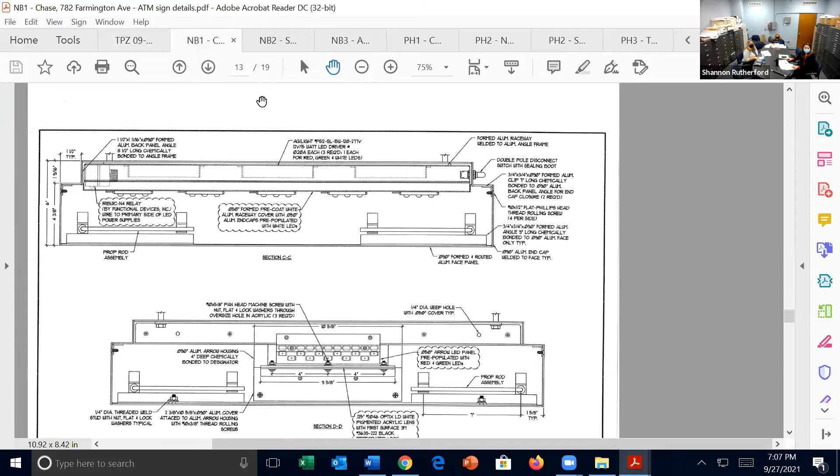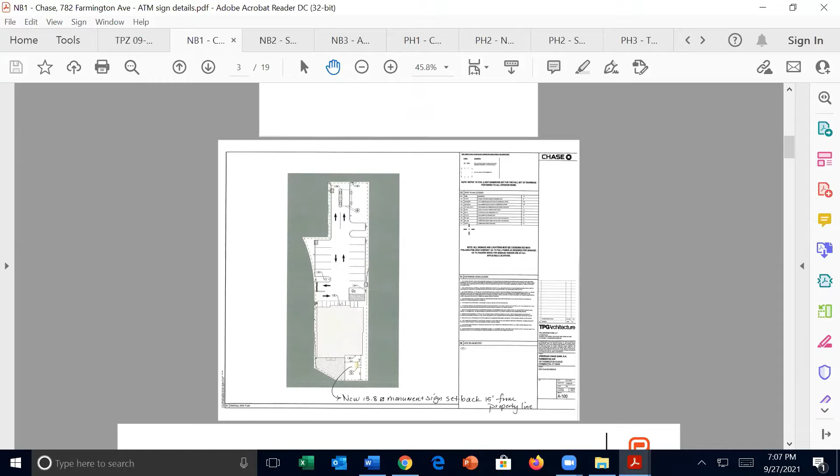Okay, good evening, commissioners. My name is Darcy Roy, as you know. I'm attending this meeting tonight on behalf of National Sign, Philadelphia Sign, and Chase Bank for the property located at 782 Farmington Ave, which is in an FV zone. The Chase wall signs at this location were already approved by TPZ, so the signs I'm discussing tonight are just in addition to those already approved signs. We are proposing a new 4-foot, 2-inch overall height monument sign. The raised logo and lettering is approximately 5.86 square feet, on a 14.3 square foot background. Both faces on both sides of the sign are sandblasted wood panels. The sides and top will have a stucco finish. The base will be brick, matching the building color. The sign will be externally illuminated on each side by one low voltage LED light fixture on the ground facing up, in the center of the sign face.

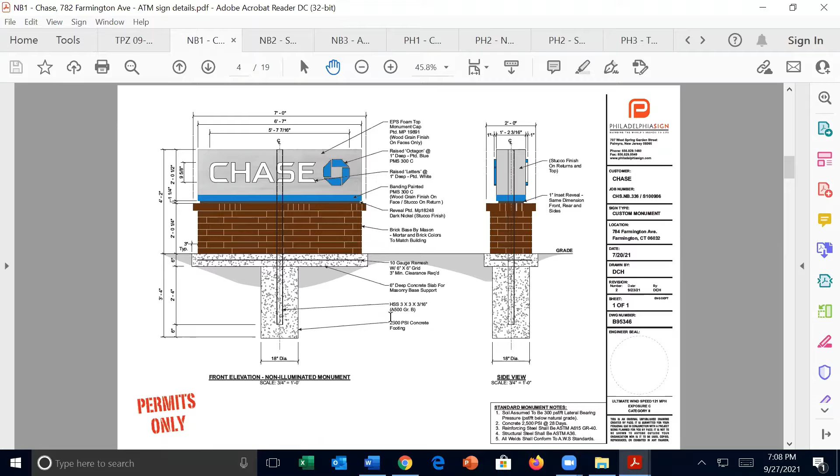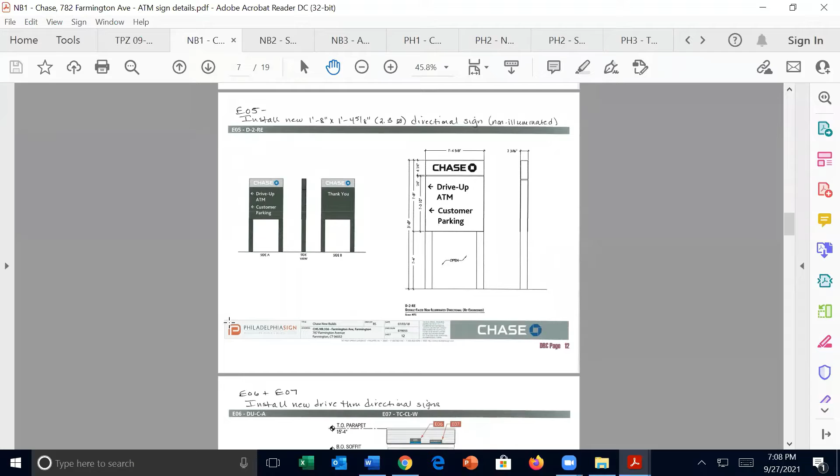In addition to this monument, we are proposing a new 2.5 square foot handicapped van accessible parking sign, and two 6.25 square foot double-faced 'do not enter' stop/DOT signs at the rear of the site off of Backage Road. We are also proposing one 2.3 square foot double-sided non-illuminated freestanding sign directing bank traffic to the drive-up ATM and customer parking. This directional sign will be located at the first entrance into the bank parking lot off of Backage Road, as you're taking a right off of Farmington Ave.

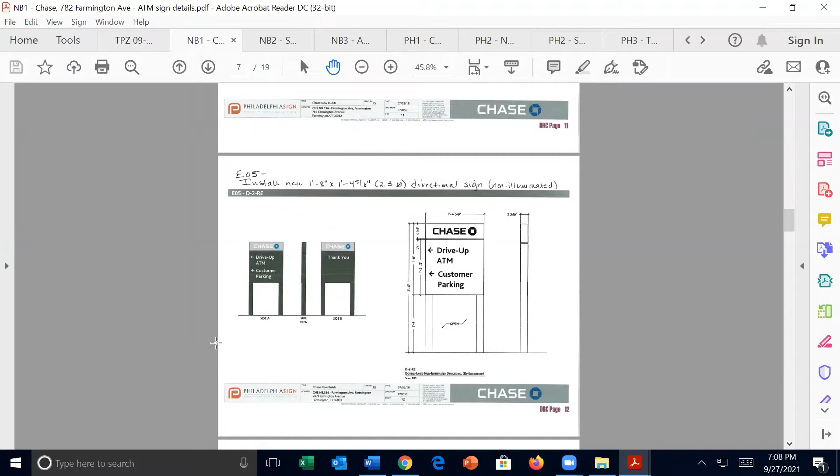Above the ATM drive-through lane, we would like to install one 3.1 square foot illuminated ATM lane sign and one 2.1 square foot non-illuminated clearance sign. The background of that illuminated ATM lane sign will be aluminum with routed out ATM lettering, which will illuminate at night along with the arrow.

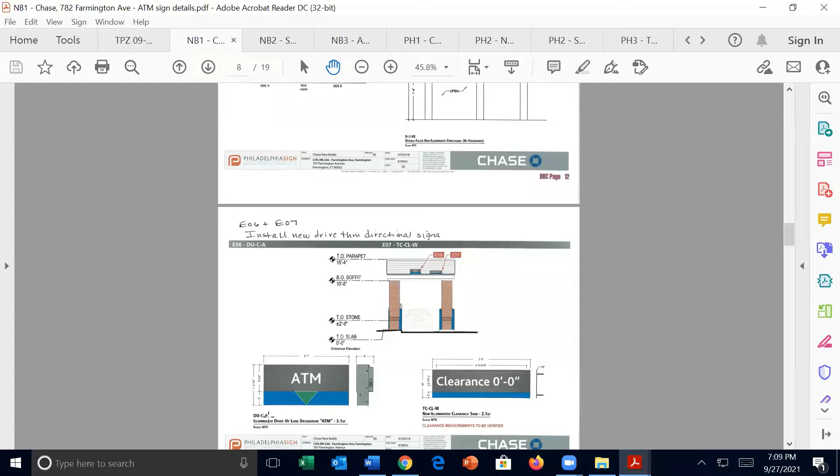I believe we meet the Farmington Village District Zone Code, given that one, we're proposing a monument sign constructed with natural materials of wood and brick. Number two, the monument sign's brick base matches the building, and the sandblasted and stucco sign cabinet will reflect the character of the surrounding area and the bank itself.

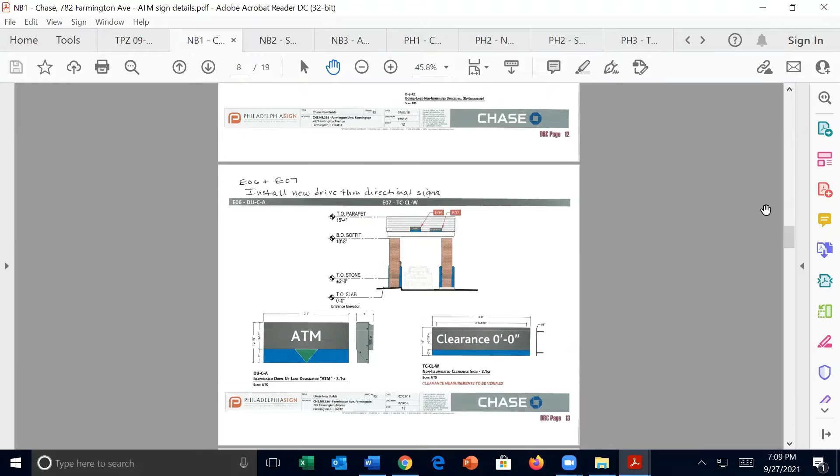We are proposing external illumination of the monument only, and the internally illuminated ATM lane sign will not be visible from Farmington Avenue as it's located behind the main building in the back of the parking lot. You also can't see that ATM lane sign from Backage Road, since it's on the opposite side from the entrance.

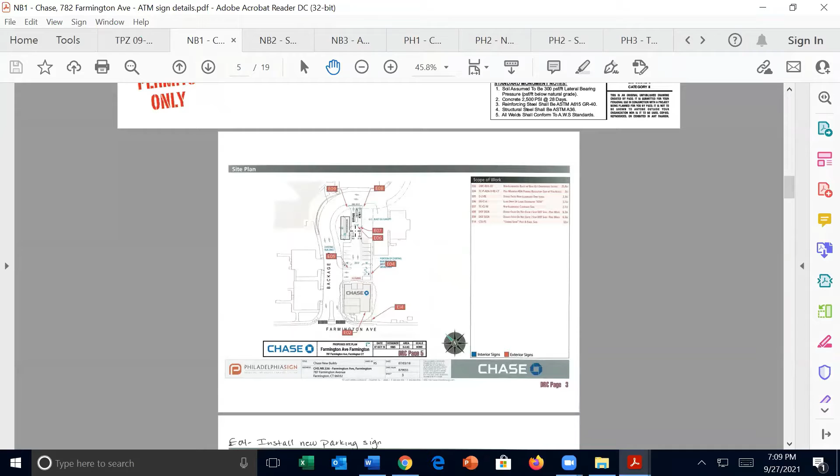So I know it didn't go in order, sorry, I didn't follow your scrolling order, I hope it wasn't too confusing. All those signs are listed right there on that site plan, if you have any questions as to where any of them are.

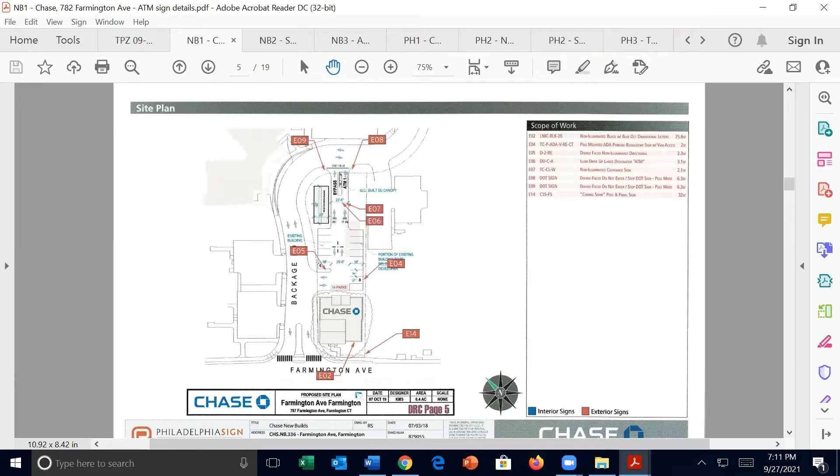Okay, no other questions. That's usually something this commission seems to ask questions about, so I was wondering if that is just going to come before us again, or is it just going to be left as is? That's for staff, I guess. Staff will typically review any changes to the approved sign plans and sign drawings. So is that a change?

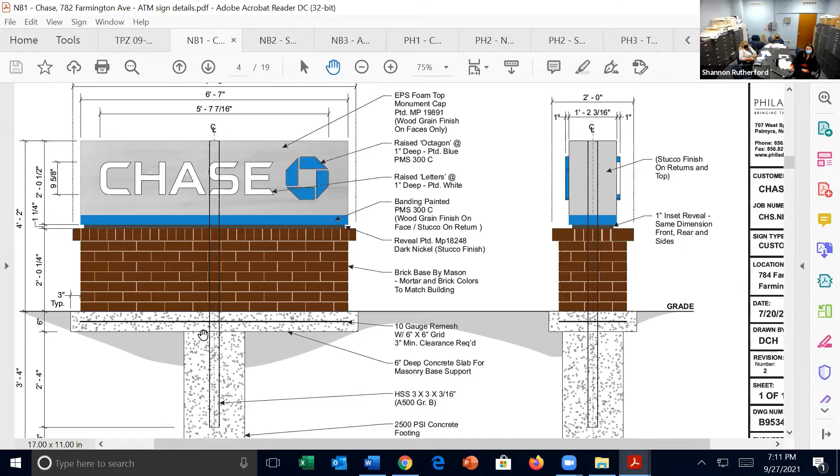Well, so you're proposing to have the location of the light here. Yep, this is the updated signage that was approved by ADRC. Right, so there's a monument light, a detached light just here at the base. I believe that was part of what went before, I wasn't there for that meeting unfortunately. But what was originally submitted to the town does show that uplighting, I'm not sure why it's not part of that package. I replaced this because there was a newer one from the commission, but let's just see because there are more drawings in here.

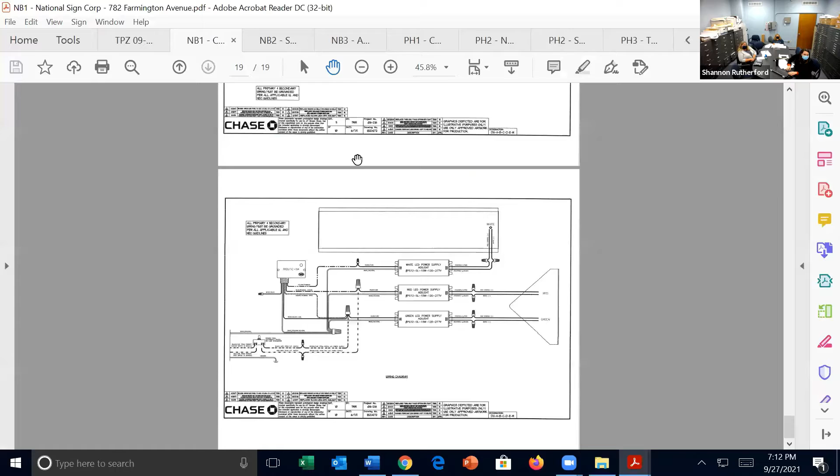There it is. Yep, this one has it, so Patrick, that shows where it is. Okay, yeah, no other question. It said that in the agenda review, but I didn't see it on there and there was no mention of it. But that's it for questions for me. Thank you. Mike, no questions, thank you.

Marcie: I guess this is just a general question, is this in the historic district, and if yes, has it been approved by the Historic District Commission? It is in the FCFV zone. This is Catherine Kramer, so it gets reviewed by the Architectural Design Review Committee. They looked at this last week, had a few tweaks to the sign face, and they have come back with a sign that has since received a positive referral from the Architectural Design Review Committee.

Great, okay, then I'll get back to there. Sorry, no I just apologize for the screen. There we go. Oh okay, no that looks great, and I think it fits, and most of them are in the back, so not an issue.

Thank you. Did John have anything? Yeah, he's here. Hey John, do you have any questions about this application? No, I don't. Okay, thank you. How about you, Keith? No questions, thank you. And Scott? No questions, thanks. And this is Ines St. James, and I do not have any questions either.

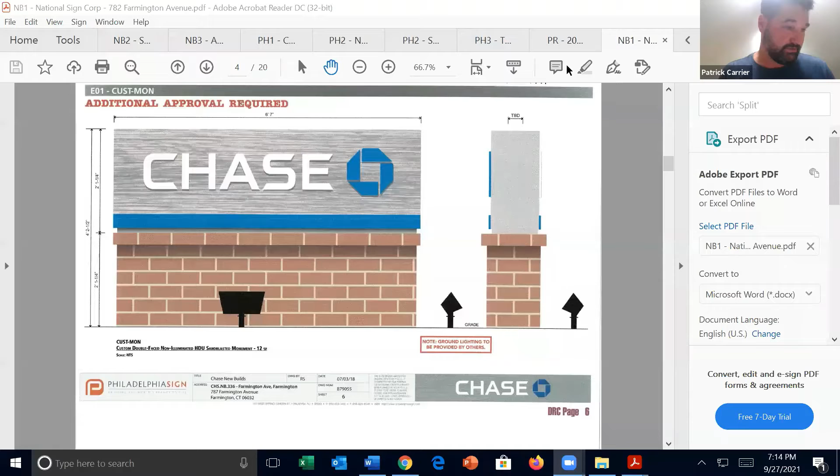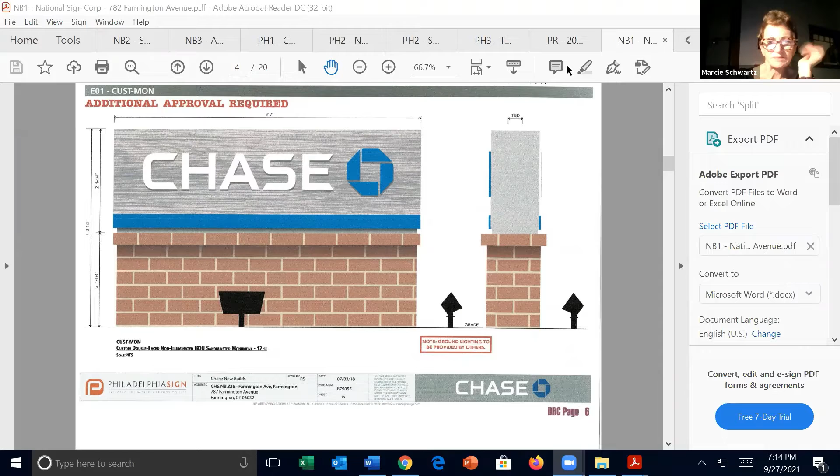Patrick Carrier: I make the motion for approval of the sign application from National Sign Corp located at 782 Farmington Avenue. Keith Weber: I second. All right, thank you, all in favor? Aye. Aye. Opposed? Abstention? Motion carries, thank you, thank you very much.

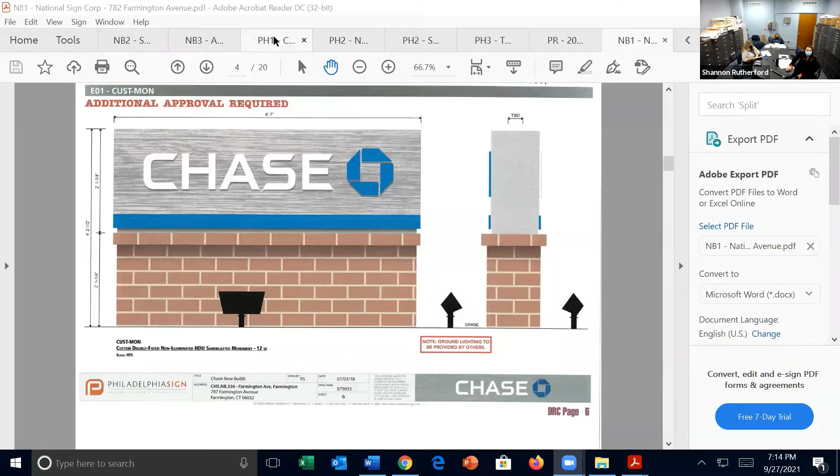You don't see them? No, so why don't we come back to that one and we'll move forward. Okay.

Next item, new business item, is site plan to replace site lighting at 781 Farmington Avenue.

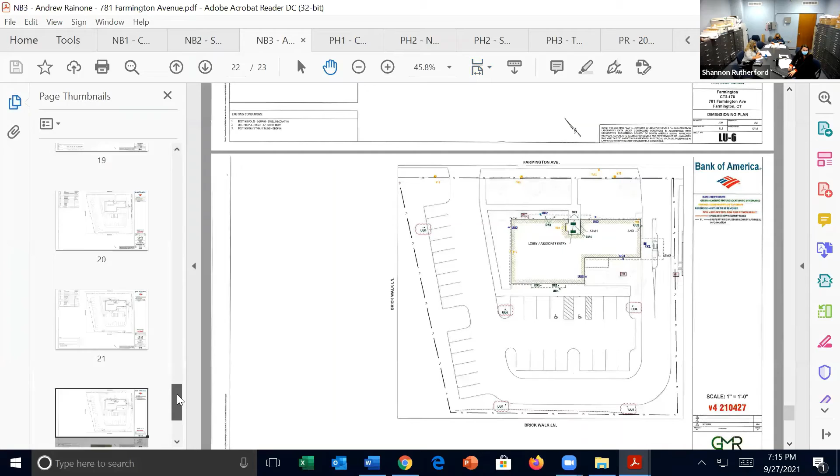Andrew, I have the application on the screen. You're welcome to present to the commission. Good afternoon, everyone. My name is Andrew with the Horton Group. Bank of America would like to replace some of the existing lighting as well as add a few new fixtures, including 5 wall mount colonial style fixtures to improve their security lighting for the safety of their staff and customers after hours.

We've gone to great lengths to reduce the amount of lighting, especially at the property line. If you look at the foot candle chart, we're actually very low compared to some of our other sites. So this is really just going to be a small improvement, more of a visual improvement with the new decorative fixtures on the property. Very minimal light leak, if any. If anyone has any questions or concerns, please let me know.

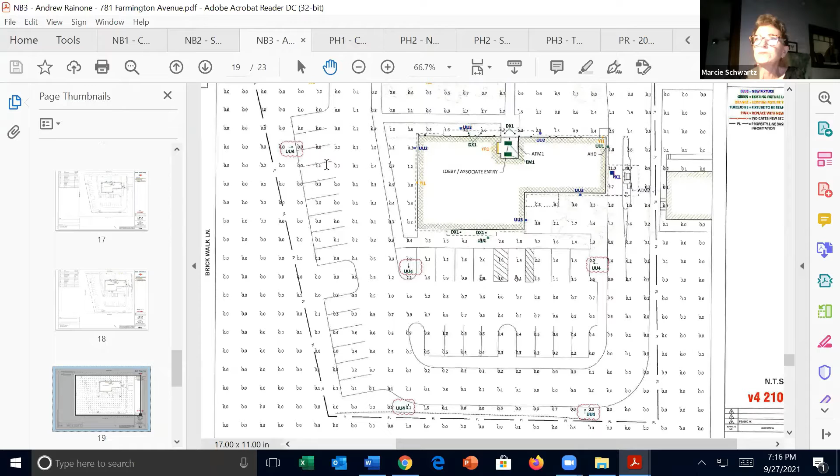Okay, thank you. All right, commissioners, Patrick, you have any questions? Not right at this moment. Okay, how about Mike? No questions, thank you. Marcie? No questions. Keith? I have no questions. John? No questions. And Scott?

No questions. Okay, so this is a replacement, right? If I don't mind, Andrew, you can see my mouse, right? Yes. So if I'm circling around these ones that are looped, UU4 here, here, here, these 5 are replacements? Correct. So those are existing square steel poles with shoebox metal halide fixtures on them. We're going to be adding a gooseneck and the decorative colonial style light pole fixture to those existing poles.

Great, and then these ones, UU2, 1, 2, 3, and this one, are new? Yes, so those are new wall mount colonial style fixtures that'll be on the building. And then one new one is a 2x2 fixture on the drive-up canopy directly above the drive-up ATM. Thanks for the clarification. That's what the application is for. We're good? Okay, I just wanted it all on the record.

Everyone knew what was new and what was being replaced. It went by a little fast, and it's hard with the site plans to see all of the different annotations. Okay, and this is Ina St. James. I do not have any questions either. All right, so we need a motion and a second for this application.

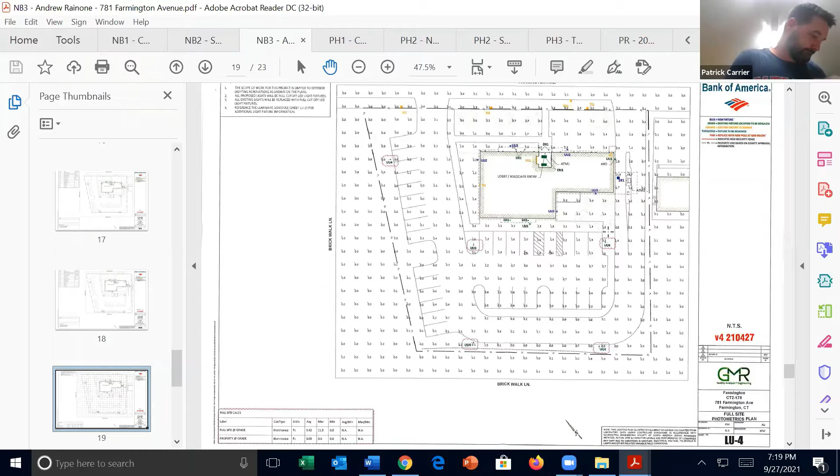Commissioners? Okay, hang on. All right, Patrick Carrier. I move to approve the site plan to replace site lighting by Andrew Ronan - sorry, mispronounced that - Rainone, site lighting at 781 Farmington Avenue. Second? I second. Thank you. All in favor? Aye. Aye. Any opposed? Any abstention? All right, motion carries. Thank you, Andrew.

And is this prior application, is someone here for Plains Lab? I don't see that yet. They were on last week for their architectural design review. Okay, proceed. Can come back if they join us at the end.

So the next one is just scheduling a hearing date, correct? So we accept the application. Do I read the whole thing? Yes, I probably should. Okay, all right, back in order.

All right, the next application is from JDA Farmington LLC. We're accepting an application this evening for a re-subdivision of 784 Farmington Avenue and scheduling a public hearing with a recommended hearing date of October 13th, 2021. We need a motion and a second.

I'll do this one again, I'll get better at this, I swear. Me too. All right, I move to accept the application for a re-subdivision by JDA Farmington LLC of 784 Farmington Avenue and schedule a public hearing with a recommended hearing date of October 13th, 2021. I second. Thank you. All in favor? Aye. Aye. Any opposition? Abstention? Motion carries. Thank you.

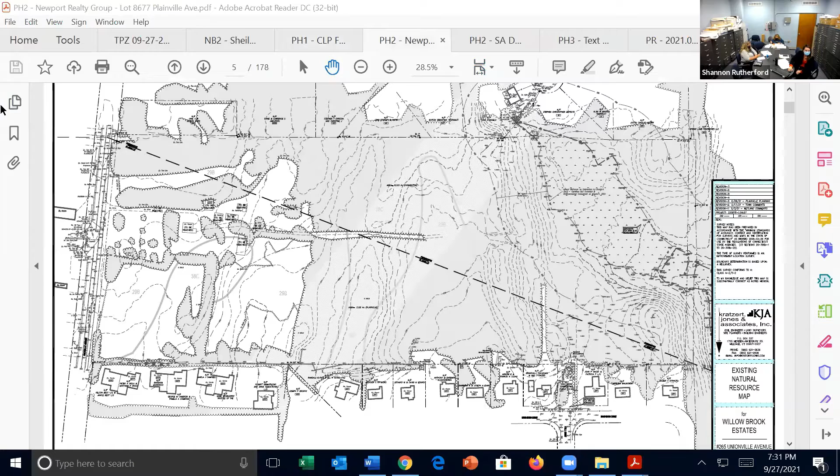All right, moving right along. All right, we have the second public hearing from Newport Realty Group LLC. It's an application for change of zone from R20 to SA, Special Permit and Site Plan for active adult development located at 8677 Plainville Avenue. And who do we have presenting?

Mark, are you on the line? Good evening, Madam Chair, members of the commission. Chris, thank you, can I go ahead? Please, thank you. Okay, yeah. All right, good evening, I'm Chris Hoheb. My office is located at 314 Main Street here in Farmington.

With me are the principals from Newport Realty Group LLC, Mark Lovely and Anthony Valenti. Also, Andrew Quirk, an engineer, and Scott Hesketh will testify. He's a traffic engineer. Procedurally, the mailing is complete.

I should note that with each notice that went to the neighbors, it was coupled with correspondence from Mark making himself available to answer any questions or provide any information. I'm not aware of anybody contacting him. The maps, plans, and reports were timely filed with town staff. I think the most recent update was September 23rd -- Andrew can correct me later if I've got that wrong. The sign was posted on the 19th and it's been maintained, and the notices were published.

I would like to give you a 2-minute summary of this parcel. As you know, it lies in Plainville and Farmington, and it existed primarily as agricultural land for personal use in the 1970s and 1980s, and then it was used to grow and cut hay until the 1990s. The current topography still retains features of that farm use. As an agricultural use, it was essentially clear cut for personal farming use and for hay.

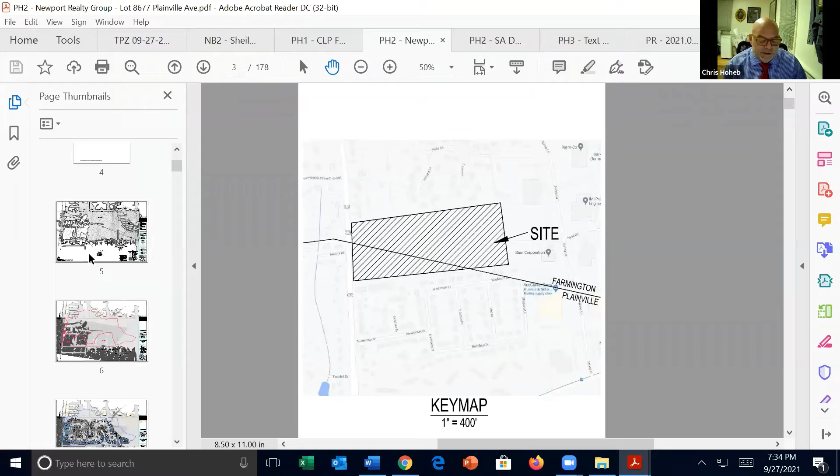And I think they've worked very well with this staff and also very well with the Plainville staff, as evidenced by a unanimous vote in Plainville supporting the approval. Our engineer in this matter, Andrew, and our team worked very hard with staff.

And as usual, Bruce Sear, Shannon Rutherford, and Ms. Kramer were all extremely helpful, assisting and providing us information and feedback. It felt almost like we were streamlined because we got the plans in very early after the Plainville approval, and staff has really been terrific. By Friday, Bruce Sear had reduced the engineering comments considerably, really to a true minimum. I'll let Andrew speak to that when he's up.

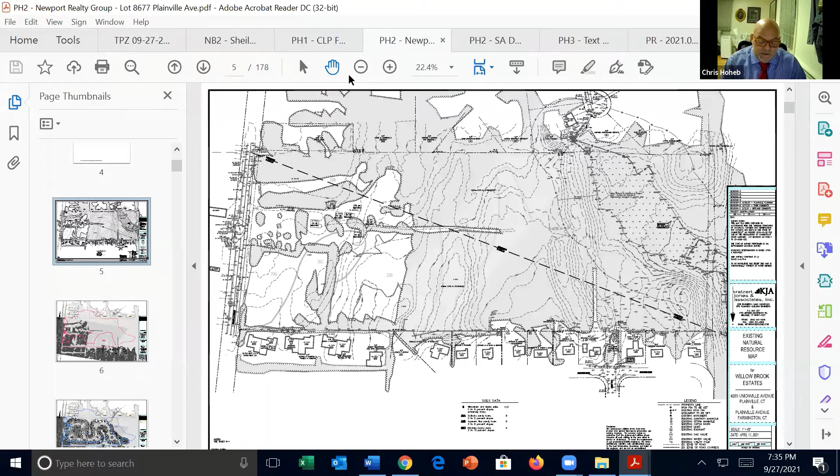Procedurally, let me bring you up to date. This spring, the Farmington Inland Wetlands Commission conducted a thorough examination of this parcel relating to the application for regulated activity within wetlands review and upland review area, and they also walked on site as part of their inspection. On May 26th, the commission issued its approval with conditions. On July 20th, 2021, the Plainville Planning and Zoning Commission unanimously approved 38 units of active adult housing as part of the entire application.

I know many of you were not around when this original active adult regulation was ratified in Farmington. I think I may have been on the commission when it was originally ratified and passed, or by my recollection, if I was not, I was very familiar with the underpinnings of the zone. At the time, it was a very stringent regulation in terms of requiring certain components to make it attractive and fit within the community, and I think it hasn't been changed since. It's a much more stringent examination than you see in other communities. So the purpose was to allow folks over 55 to find lower maintenance dwelling units, and certainly these fulfill that aspect.

For tonight, we're going to perform the initial presentation covering all the salient requirements of the zone change, the special permit, and the site plan. And of course, we'll be available at the end for questions from the commission and to respond to the public.

Andrew Quirk, our engineer, is going to speak first and discuss the site plan. He's also going to talk about the architecture, and Scott Hesketh will talk about the traffic. And I'll conclude with probably not as exciting, but very important criterion and requirements of a zone change and a special permit, which are similar. All their testimony could be supported by Tony and Mark, who are present in case we miss something or they want to provide more information to the commission.

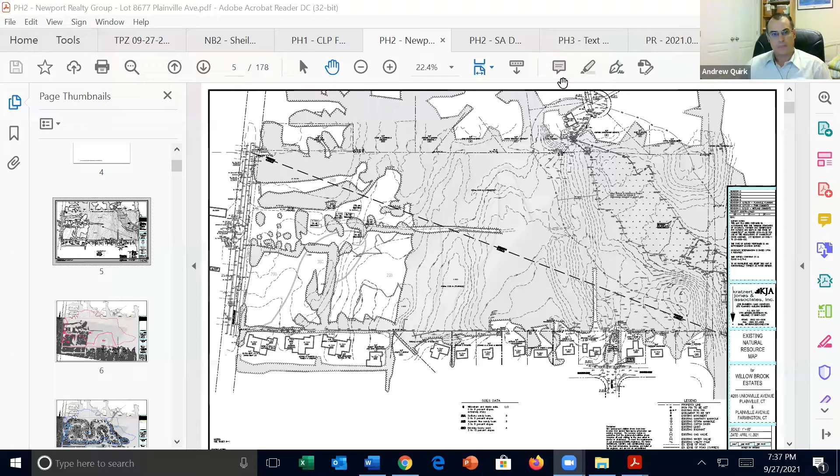Again, Andrew Quirk, professional engineer and principal with Kratzer Jones and Associates. As Chris had talked about, I'll be going through the survey mapping, the site plan layout, get a little bit into some of the utilities, drainage, and the details of the landscaping. And then at the end, I'll be happy to take any questions.

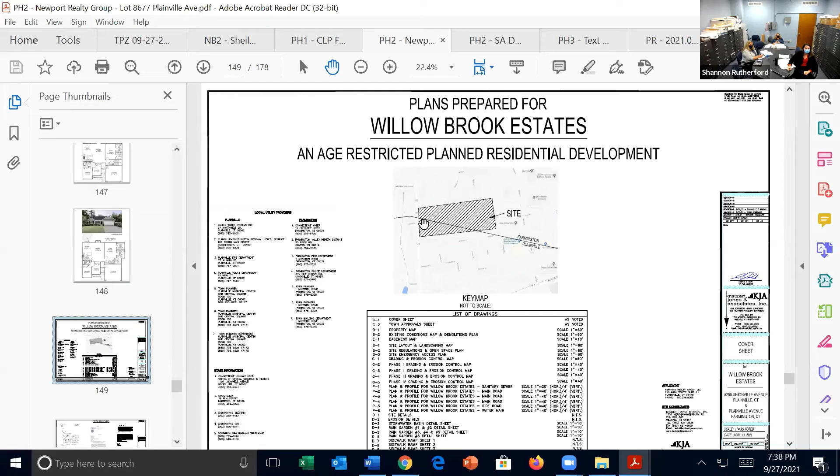I guess just for pragmatics, Shannon, if you want, I could do a screen share, or I can walk you through which sheets I think are appropriate for the presentation, whichever way is easier or better from the town standpoint. Hi, Andrew, this is Catherine here. I have this cover sheet right here, if you want to walk through this set. That's fine, I have color aerials as well, if there's a screen share. No, we're not going to be screen sharing this evening, it's for control purposes. Sure.

So on the second sheet, page 150 there, for the commission's information, those are the approval letters, both from the Farmington Wetland Commission, describing those conditions, and as well the approval through Farmington, which I think had only one condition, a detail of the phasing plan. So those approvals and conditions have been incorporated into the latest plan set on that sheet.

To begin, on the next page, sheet P1 is the existing property as was described. The total property is 25.66 acres. It straddles the Farmington Plainville line, which is shown diagonally across the property. There are 12.63 acres in Farmington, so almost an equal split. The hatched area to the right or northeast portion is the area that was delineated as inland wetlands, and the flags located by our survey.

And then outside of that is the 100-foot upland review area. We already received approval from the Wetland Commission for the one activity in the wetlands itself, which is a minor off-site crossing. It's not even on this property, but towards the top, for a sewer connection to Laurel Lane. The sewer connection comes right through that portion and just caught the end of the wetlands, which was within the review area requiring a permit. So we received that permit. All the other activities are generally outside of the 100-foot upland review area.

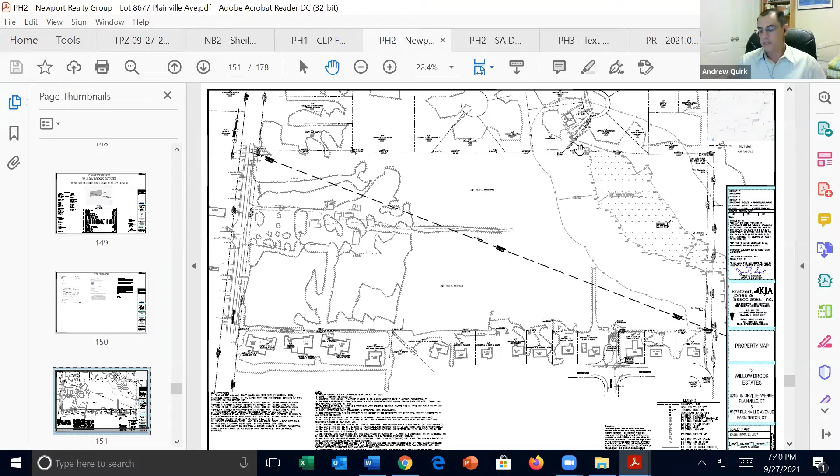I'll get into it more with the site layout plan, but there was also a condition of that approval that, in addition to the open space being controlled by the homeowners association, an easement be granted to the town for the open space area, including the wetlands and all the surrounding area, to give that area further protection in addition to the protections of the homeowners association, so the town could also step in to ensure that area remains protected.

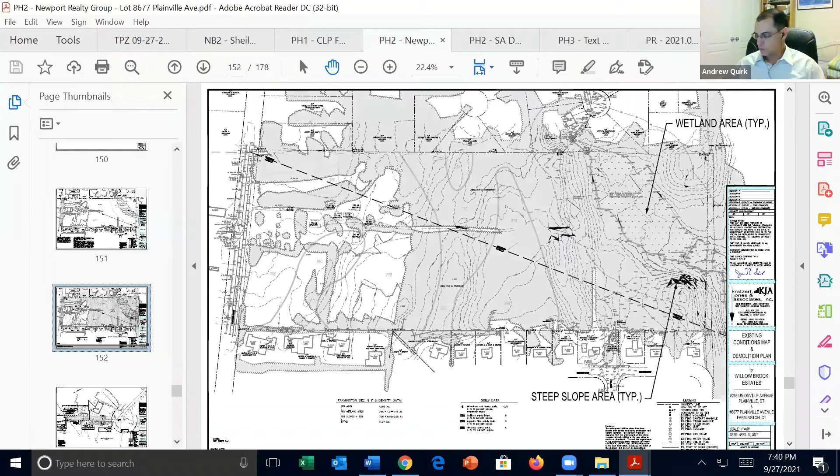Going down, I believe, two more sheets - would be sheet S1. I believe one more page down. Yes, so sheet S1 is the overall site layout and landscaping plan.

This page gives you the best overall basic view of the development, which would have access from Route 177, Unionville Avenue in Plainville. So the only vehicular permanent access to the site would be through Plainville. That roadway network would then cross the site in a way that works well with the grades and for aesthetics, in a curvilinear fashion from west to east on the property to a cul-de-sac in the lower right portion, with a turnaround area there. Then there is an emergency access - not your standard access, but just in cases of an emergency - that would also connect to Plainville. To the top right portion, there's a small clearing for the sewer access, again only for sanitary sewer, not for vehicular access. So all the permanent vehicular access will be through the state highway.

We've already started contact with them, and our traffic engineer, Scott Hesketh, will go through that in more detail as far as the vehicular access.

The site would be fully landscaped, the areas that are cleared with street trees. There'll be a street tree in uniformity with Plainville standards every 60 feet on each side of the road, with a variety of trees that meet the street tree requirements for shade and aesthetics. We also got into the details of the shrub plantings around the foundation. There's a large buffer area along the north property line to be retained, as well as natural vegetation within the development between the different phased areas.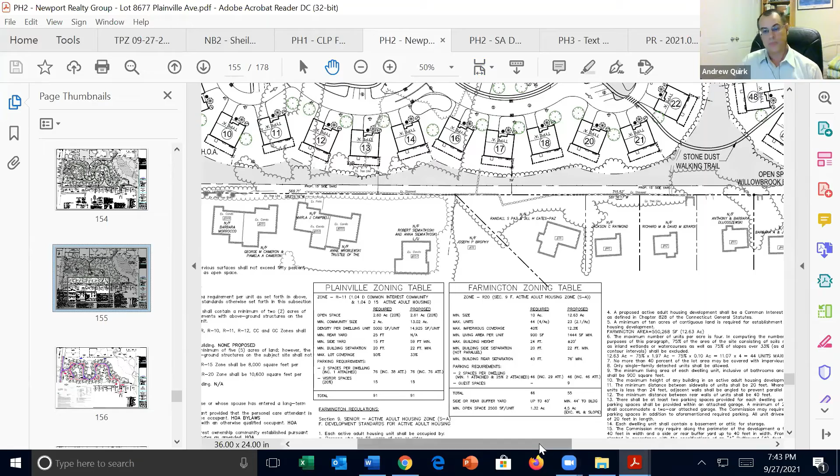On sheet S2, this is in a little bit more detail than S1, where we get into the regulations. On the plan you'll see both the Plainville and Farmington regulations, but specific to Farmington with the zoning table, there are many specific regulations. So what we did is we included the text verbatim from the regulations and then provided the answers right on the plan, so it was clear we were meeting each of the zoning regulations, and then we summarized that in the zoning table.

Again, the Farmington portion is 12.63 acres. There are 23 units proposed in Farmington, whereas 44 are allowed. We have 12.28% impervious, where 40% is allowed. And then there are some other architectural and separation requirements we also meet, including a minimum of 22 feet between the units.

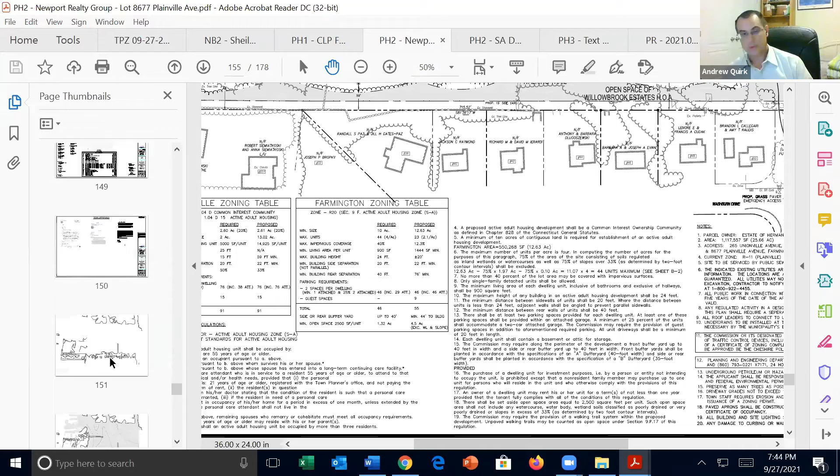All the units will have a 2-car garage. Also, outside of the 2-car garage there's the ability to park 2 cars outside the garage - we didn't count that towards the parking table, but that ability exists. And then we provided 9 visitor spaces. So 46 spaces are required, and we're providing 55 between the garages and visitor parking areas.

We also have that north buffer area identified to preserve the natural vegetation per your requirements - that's 1.1 acres that will be held by the Homeowners Association as a natural vegetated buffer. In addition to that 1.1 acres, there are 5.4 acres on the east that will also be held by the Homeowners Association, with an easement deeded to the town to protect the wetlands and all the area around that. So that totals 6.5 acres out of the 12.63 acres in Farmington - just about half the area will be preserved as open space within the Homeowners Association, with that 5.4 acres also deeded to the town for protection.

Item 19 in your regulations talks about using these buffers, landscaped areas, and vegetation areas to create a community feel and a community walking trail system. So we've outlined a system where on all the private roadways, there'll be a sidewalk on one side that provides a walking network along the streets.

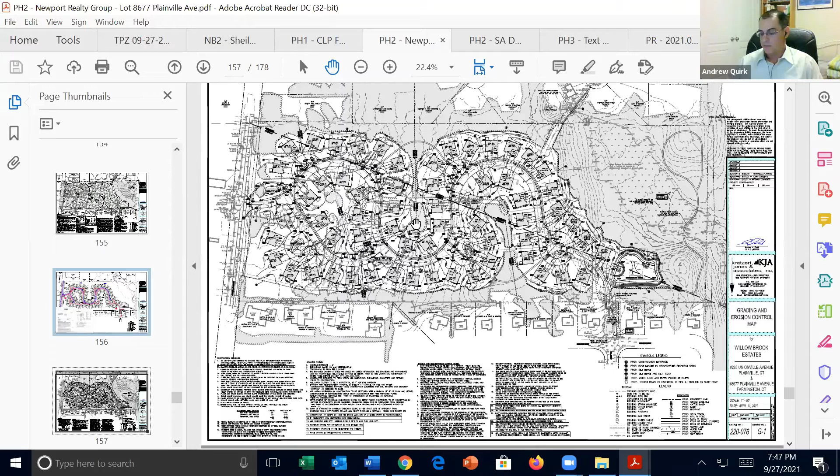On sheet G1 is the overall grading plan, and it shows the phasing. I won't go too much into detail of the grading and utilities, but I want to point out that in addition to the 23 units in Farmington, there are 38 in Plainville. Phases 1 and 2 are entirely in Plainville, and phase 1 has all its utilities also from Plainville. So that's really a separate, independent phase from the Farmington application.

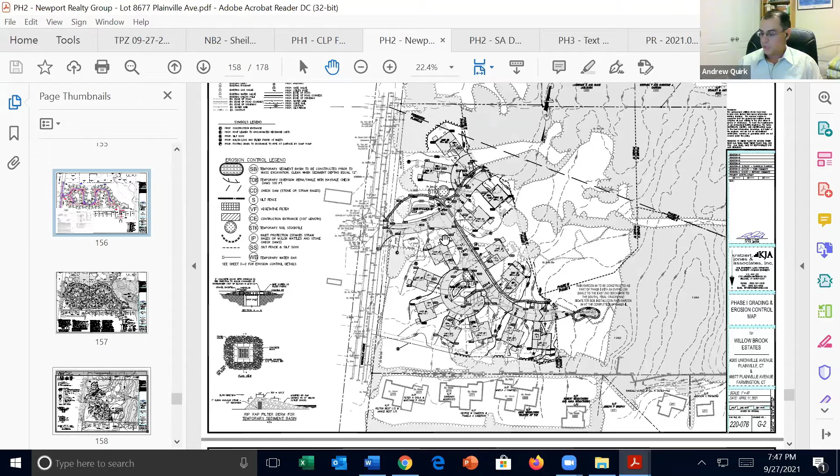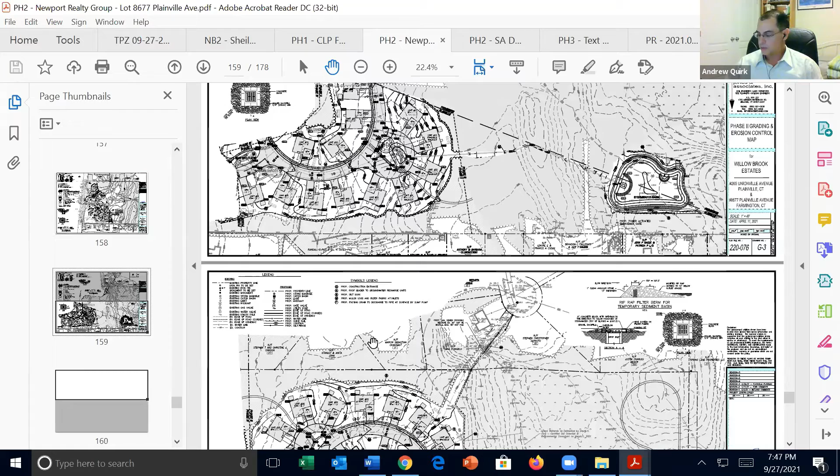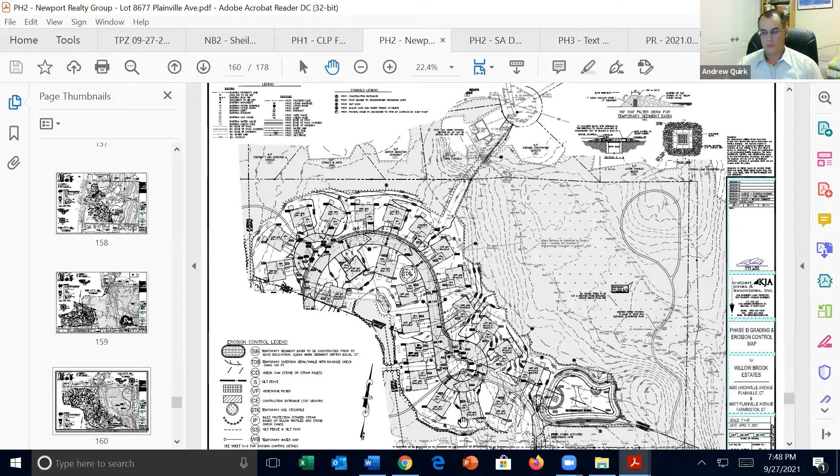Phase 2 has all homes in Plainville, but the sewer access will be through Farmington. We've worked very closely with town staff on the sewer access, and we've already received the wetland approval and the intertown agreement for sewer service to the Plainville residents. Phase 3 has nearly all but 5 units in Farmington—there are a few units on the cul-de-sac area in Plainville, but with the road system there, we've included it as part of phase 3. Same for phase 4 towards the northwest, which is about half in Plainville, half in Farmington.

The phases are really important in terms of clearing. One of the conditions the engineering department put on this is that only one phase is to be cleared at a time, which we've noted on the plans. This helps control the amount of exposed soil, erosion, staging, drainage, and implementation. We expect all 4 phases to be completed in around 3 to 4 years, typically about a year per phase, maybe a little faster.

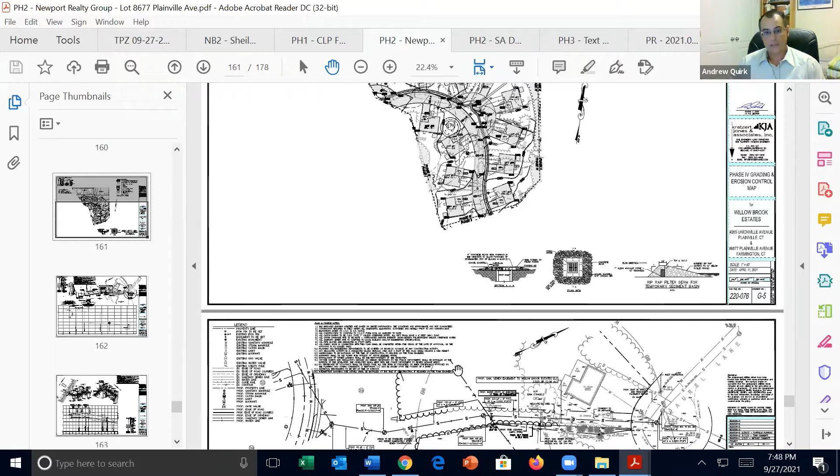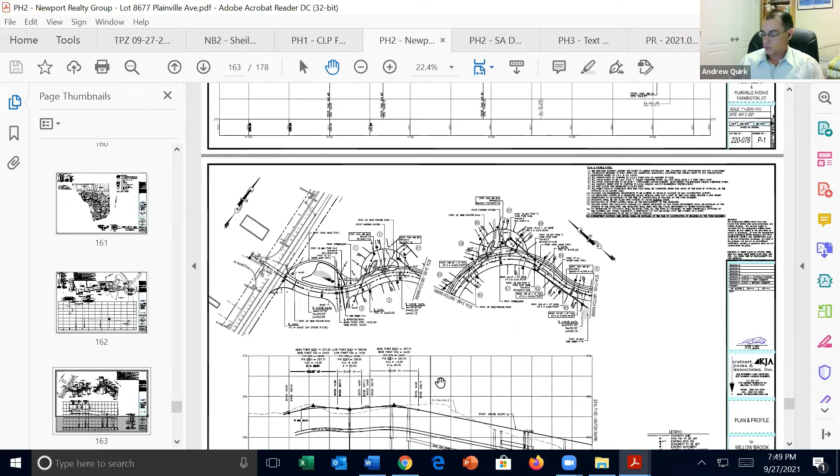We've worked very closely with town staff on the stormwater management plan. Within each phase, there's a rain garden system which provides aesthetic value through plantings and pollinator abilities. We've got detailed landscaping plans for each rain garden that help with water quality and low impact development, while also providing some attenuation in peak runoff. All the drainage is conveyed down to a stormwater basin in the far southeast corner of the property, and we meet zero increase in runoff through the 100-year storm event—the 2-year through the 100-year storm event—through that combination of rain gardens and the stormwater basin.

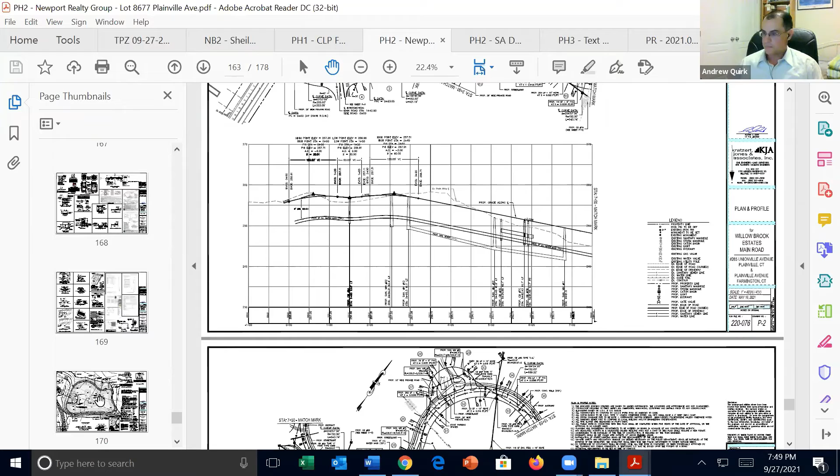Again, we've worked very closely with town staff. I don't want to speak for staff, but as of Friday I think we were down to just a couple of technical notes that need to be worked on together regarding the sewer connections and some notes regarding the phasing. Really, we were down to just some minor details. It was a very thorough review, both at the wetland stage and through this planning and zoning stage, and I think we've been able to complete and satisfy all those comments and work with town staff.

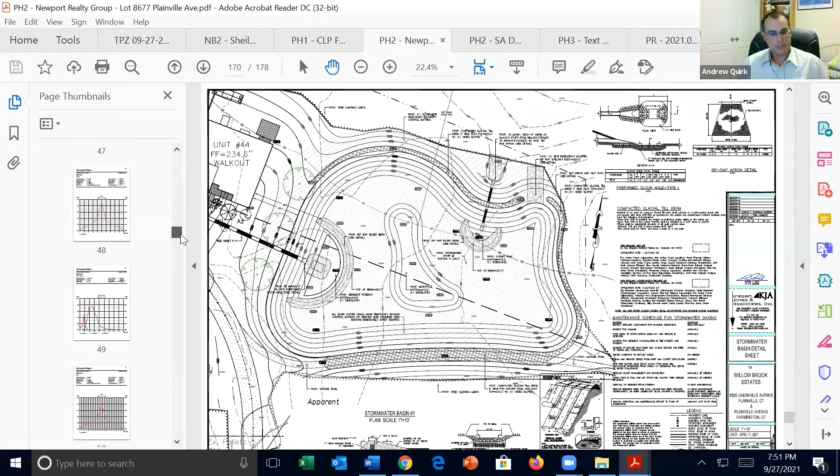I will briefly go through the architecture as well. I don't know if that's included in the same PDF—it might be at the end. They were in here, it might be a separate PDF. I think that's all the traffic information. We're proposing 3 different styles of units, labeled unit style A, B... yeah, it was in this, right before this plan set. I thought it was at the end. I thought I reorganized it so they were in order, but I didn't touch this one. That's all the drainage information—somewhere, it's in here. It's definitely a long drainage report. Yeah, there's a lot of work that went into this. Comprehensive. Now we have traffic—and that's traffic, yeah.

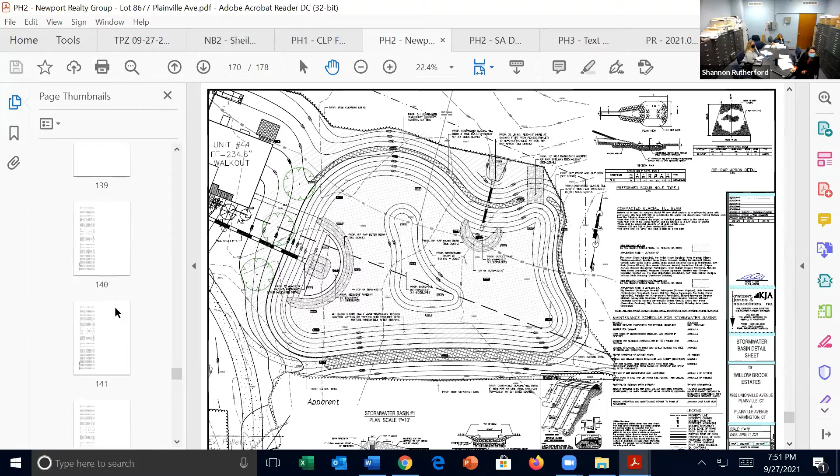Is it what you said today? No, that was traffic, a different one. Comps, here it is. Oh there, yep, there. Sorry about the delay, guys. Yeah, no problem.

It's a comprehensive package, so we have 3 unit types: house plan A, B, and C. They all have first floor master bedrooms and are all at least 1,400 square feet. In addition to the unit types, there'll always be a variety of colors and styles. They'll never be the same color allowed on 2 adjacent units or 2 units across the street from each other.

They're all 3 bedrooms. That's really not because of the occupancy. You have in your regulations the requirement of the occupants to be over 55, or a family member over 21. But we find that the additional bedrooms are used more as a study or a den, things of that nature, but they are labeled as bedrooms. Very nice large units that have been very successful in other towns and have sold well. I would expect the same for this project if it moved forward.

And with that, that would conclude my portion of the presentation. I think next would be Scott Hesketh to discuss the traffic.

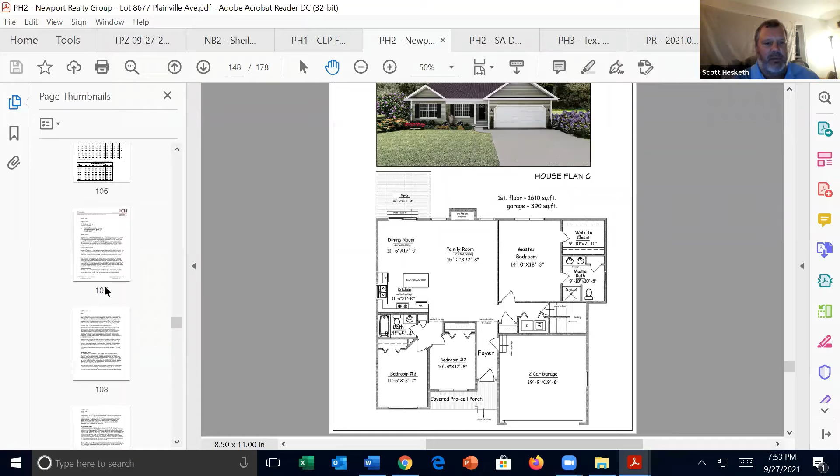We did submit a traffic report dated April 21st, 2021, which is now up on screen. We were asked to take a look at the potential traffic impacts of this proposed development. In order to do that, we reviewed traffic volume count data from the state of Connecticut. We also conducted manual turning movement counts out at the intersection of Route 177 and Maxine Road. Due to the COVID situation, we ended up relying on 2015 traffic volume counts from the DOT, as the most recent counts from the DOT were taken during the COVID conditions.

So we used the 2015 count data and grew that at a 1% per year growth rate to reflect 2022 traffic volumes, and adjusted that based on the manual turning movement count percentages we observed in the field. DOT did not have any traffic volume counts on Maxine Road, so we increased the traffic volumes on that roadway by 20%, which was basically the difference between the 2015 counts and our 2020 observed traffic counts. So we believe we have a good handle on the background traffic volume conditions in the study area, and all that information is presented in the report.

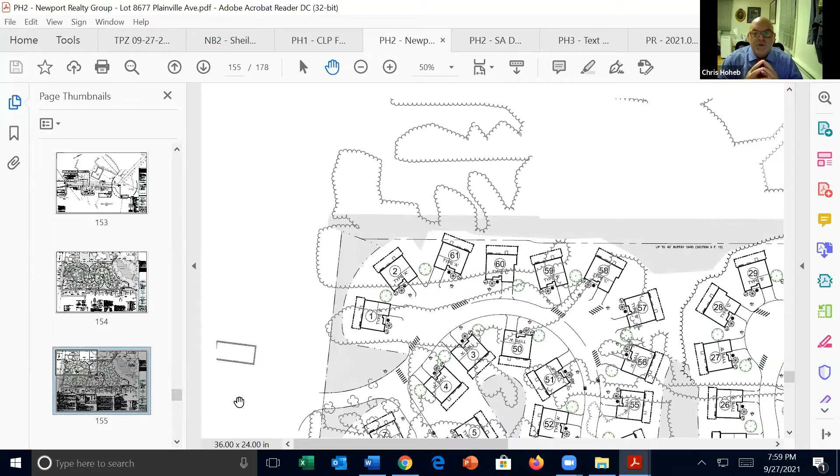Thank you, Scott. Members of the commission, I'd like to take about 5 minutes to go through the criterion and standards described in section 12B of your Farmington regulations as they apply to a zone change and a special permit. I know you're all very familiar with these standards, but I want to apply them to the facts of this application.

The first is that the existing and future character of the neighborhood will be protected. I think it's noteworthy that there'll be no through traffic. There's no egress into Farmington directly - it's in Plainville - so the Farmington neighborhoods will not be impacted. There's plenty of buffer around the entire application. It's residential lighting, and I don't see any possibility for noise to be created. I should note that waste removal will be by private contract, so the association has control over the hours - it's not like a town where they come in really early. So I feel pretty comfortable representing that the character of the neighborhood will not be impacted.

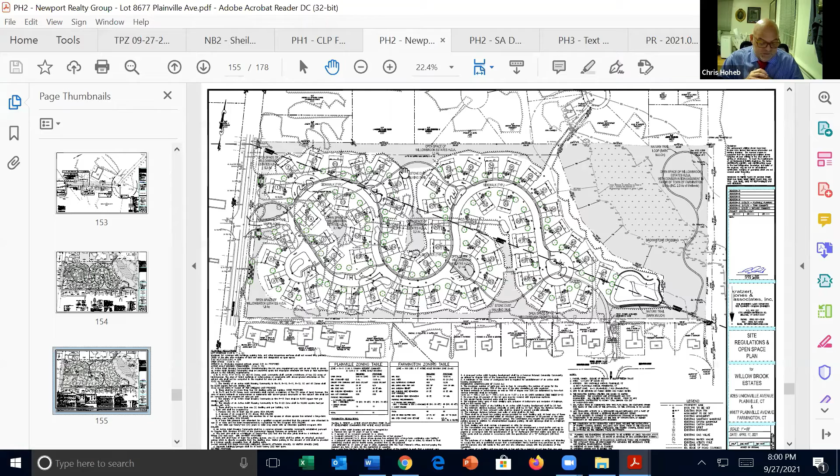The next criterion is that adequate safeguards have been taken to protect adjacent property from detriment. Other than the initial construction, the surrounding Farmington neighborhood and streets will have little or no contact. While there are some walking paths that could be accessed, there will not be any motor vehicle traffic. And there is the emergency exit, but that is not going to be open except as available to municipal emergency services. So again, I don't see any real impact.

Next is that the traffic circulation within the site and the amount and access to parking is adequate. You've heard our engineer discuss parking being adequate. I should note that the design follows a lot of the topography - it actually fits extremely well. And I want you to note that these roads are curvilinear, not a grid pattern - very much a New England feel. I think that supports the adjacent neighborhoods in that it creates more of a New England or rustic feel in terms of the appearance of the entire application.

Next is that the road network, to include intersections, will be capable of handling the traffic generated. Again, the entrance and exit are in Plainville.

You should also note this is an active adult community, so there'll be fewer people in the units, and very probably you won't have teens or school buses. Active adult over 55 has typically a different schedule than younger folks who have to get to work at a certain time, so there's a return from work and a leaving for work. People over 55 have a different kind of rhythm in terms of traffic.

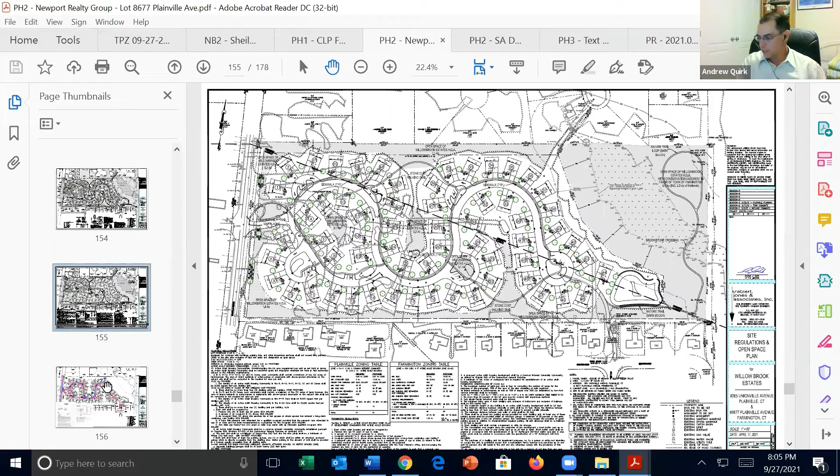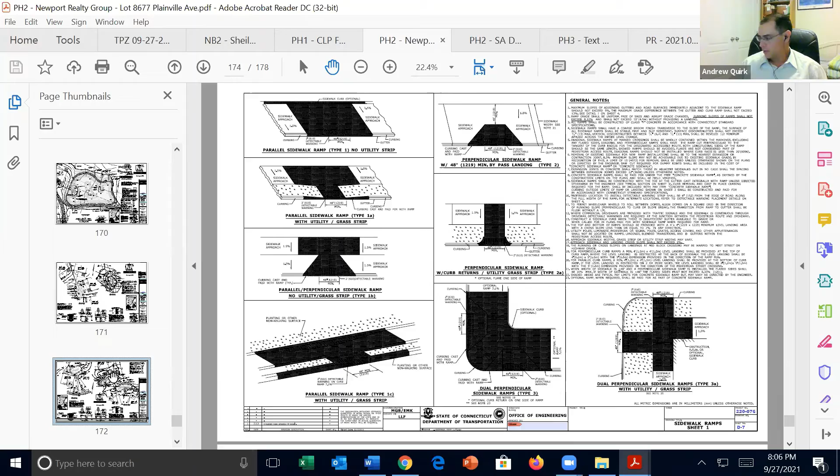What kind of lighting is there, site lighting? The plan is hard for us to see, it's small on the screen, but can you go through the lighting? Yeah, Andrew Quirk again, the engineer. Excellent question—we're proposing lighting shown on the roadway plans along the private roads. There's a detail on sheet D2, quite a few pages into the set, about 8 pages from the last page of the plan set. Sheet D2 shows a colonial style lantern, street type lantern, and on the right side it shows the type of fixture to be mounted on poles, similar to what you'd find on public streets, but with a colonial style lantern.

And somebody must have gone through it for light pollution and all that. Yes, that was part of the review.

Okay, thank you. Another question: the emergency entrance—is that something that's maintained in terms of snow in the winter? Well, first, it's a grass paver entrance. We have a detail, also on sheet D2, in the middle of the sheet. It shows plastic units with a stone base material to support the loading of emergency vehicles, but overfilled with topsoil and seeded to look like a grass area. So aesthetically it'll look like a grass area, but have the ability to withstand emergency vehicles passing over it.

Yes, the intent is that it would be plowed, and we did go through that with Plainville—it would be the homeowners association responsible for the plowing, since these are private roads. So the homeowners association would plow up to the intersection in Plainville. There's a gate shown at the property line, and one comment from your staff was to put a sign at the location in Plainville noting it's emergency access only, although the gate is at the property line.

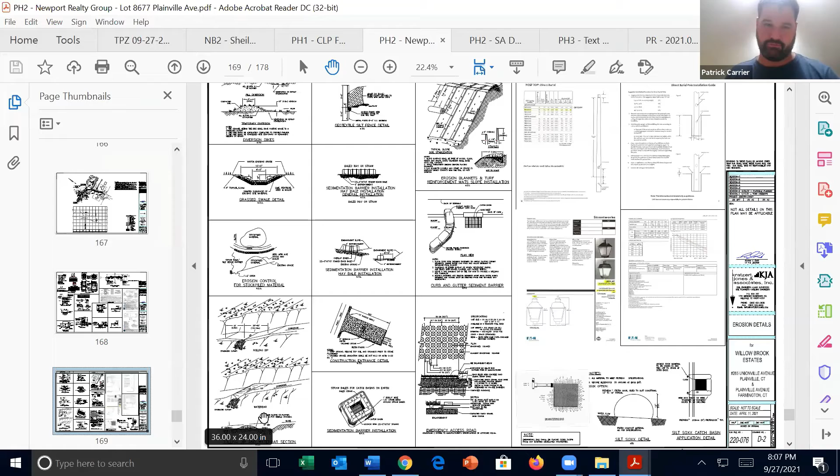Okay, and my last question is on the walking trail, the walking path—what is that, asphalt or gravel? I know you have the sidewalk, and then there are sections, one that goes in between the houses and one that goes back behind there. What is that made out of? I'm just curious. Sure, yeah—so we actually have 3 different materials for the walkway system. Along one side of the roadways is a concrete sidewalk.

We've got that shown with a concrete detail. Within the development itself, the sections that connect from the roadway, but off the roadway system to the next roadway, those would be a stone dust type system, graded and then covered with stone dust, so it's got a material that can be used and stable. The portion in the wetland area would be a nature trail, just hardwood bark mulch, a more natural walk system in that area. So, 3 different materials.

Okay, great, thank you, no more questions for me. Thanks. Mike? No, I think the presentation and Patrick's questions just answered most of mine. And you guys are comfortable with adhering to the remainder of the engineering comments for approval? Yes. Okay, thank you, I'm all set.

Thank you, Marcie. I guess because Patrick just brought up an interesting question, how wheelchair accessible are either the units and the walking path, and the actual getting in and out of the bathrooms and up into the apartments from the garage?

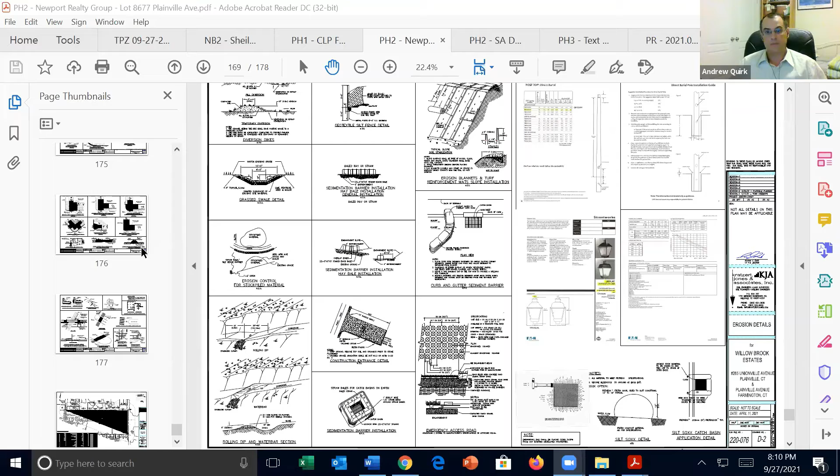The doorways and halls, are they wide enough? I believe so, yes, I can confirm that, but I believe that's the case with the doorways and hallways as well. I do know in the other developments where we've used these units, they have been modified with the ramps to be ADA accessible. They certainly can be made ADA accessible.

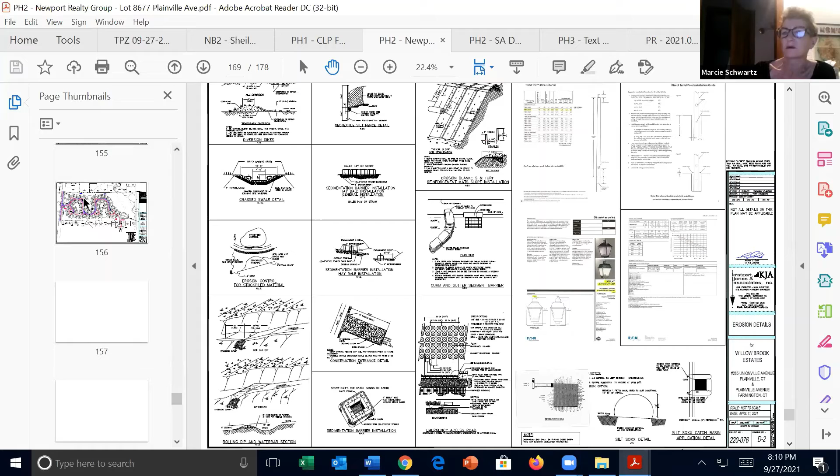Okay, and then on the traffic report, I just had questions about it. He sort of went back and forth between 177 and then a named roadway, and I didn't know what the named one was. So is there only one entrance or is there more than one entrance in and out of there?

Complex. Just Scott Hesketh, the traffic engineer. There's only one access to the site, and that is the main site driveway to Route 177. It's located opposite an existing town roadway called Maxine Road. That's the other roadway I was referring to. But there will be no light on the road at all. It's a state highway, so that's correct. It'll be an unsignalized driveway. Okay, all right, didn't know what that was.

Thank you. It's really hard to read any of this, I must say, as they come across, but thanks. That's good, I'm all set.

Thank you, Marcie. Keith? I have a question that might be sort of out of left field. I was just looking at the notes from Inland Wetlands. They had made a remark that they wanted you to set up a...

Oh, you're muted. Yeah, sorry, I just wanted to read what I was saying before I said the wrong thing. I'm using the space bar mute thing, so I screwed myself up.

But they wanted you to implement an integrated pest management system. I was wondering, is there a specific concern there, or were they looking for you guys to do something environmentally friendly? Where did that note come from? I guess I could defer to town staff, is that a standard note that they put in there? Integrated pest management, that's standard, that's fairly standard for inland wetlands for water protection. Okay, cool, I hadn't seen one like that before. I appreciate the feedback.

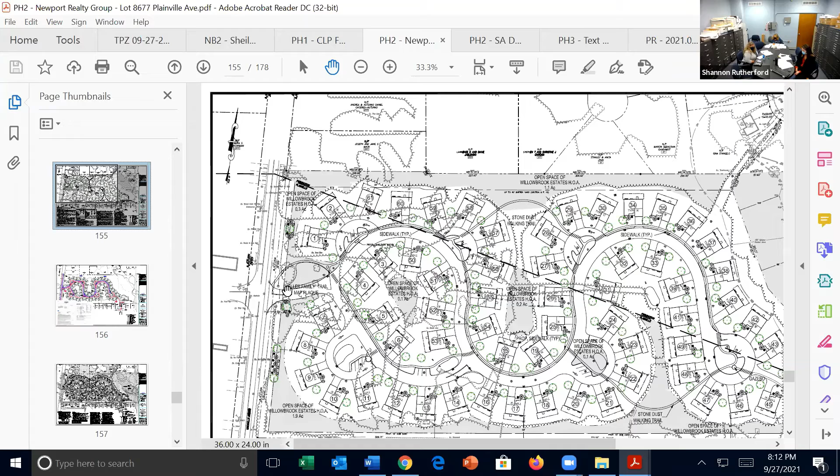All right, John? So I have no questions. I would just make a comment that this looks like exactly the sort of neighborhood the regulations are intended to set up for active seniors.

Thank you. And Scott? So thank you, I know traffic is always the top concern in Farmington. And I may have missed it, the traffic studies seem to focus on this area right outside the development. Does it take into consideration anything like the major intersections, like 177 and Route 6, or even up into Unionville, and the impacts that it could have on those?

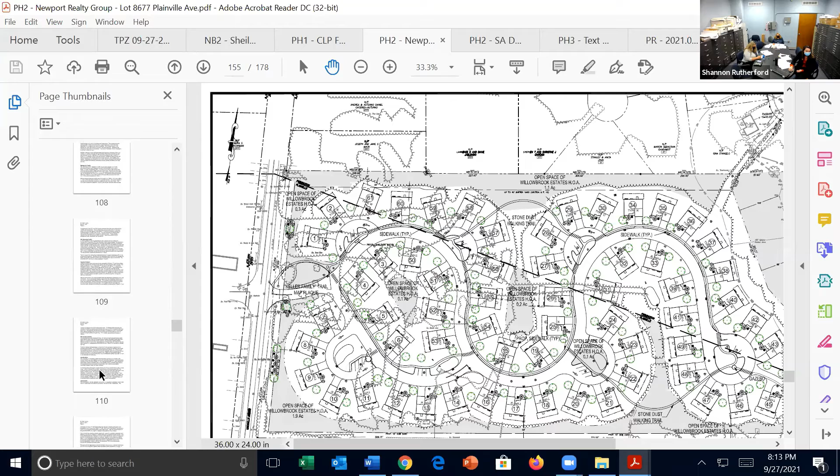Based on the trip generation projected here of 29 and 34 peak hour trips, and the directional split of approximately 50-50 in both directions, the traffic volume thresholds to analyze other intersections in town were not met. We're looking at perhaps 15 trips at either signalized intersection during peak hours, which is 1 every 4 minutes, not a significant impact to those locations.

Okay, thank you. You're welcome.

Okay, thank you commissioners. Did we as a town receive any calls on this project? We did not receive any letters or calls in favor or in opposition to this application. Sandy, can you confirm that? Yeah, I didn't receive any.

Okay, great. Nothing major, so four phases. But when will this project begin? What is the plan for the inception?

Tony Valenti with Newport Realty Group, 710 Main Street, Plantsville. Our intent is to, following the appeal period, proceed to our financing and start construction. We hope and plan before year end, so we'd like to start sooner rather than later.

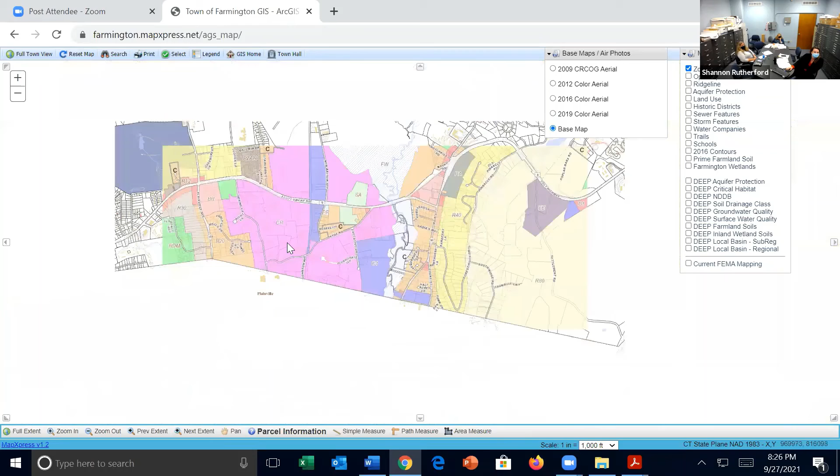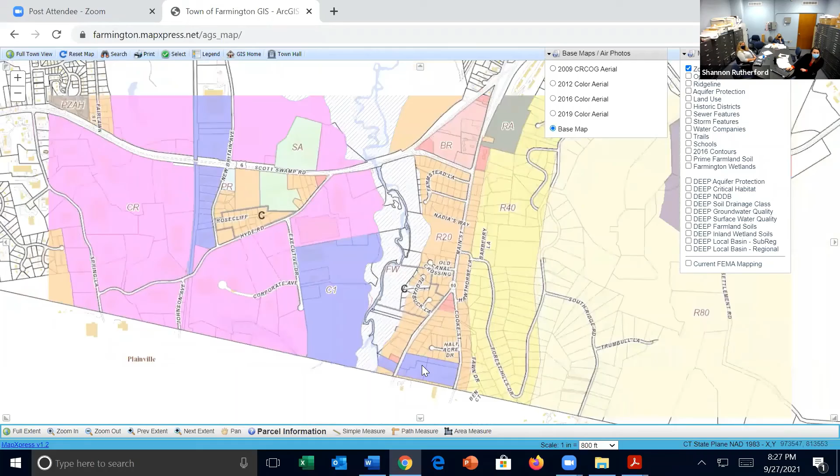Just right here. So you have CR here, and C1 is the purple. So if you look at these areas like along New Britain Avenue, down here between Cook and Main Street. So if you pull up the GIS, you can see that C1 is this purple, so there's a pocket over here, a few pockets over here.

Yeah, okay, so I see that now. And again, it's special permit, so there's other stipulations, right? You have 500 feet, and 1,500 feet from any other tattoo or body piercing establishment. And of course, it's special permit, so that's something that would come through Town Plan and Zoning Commission.

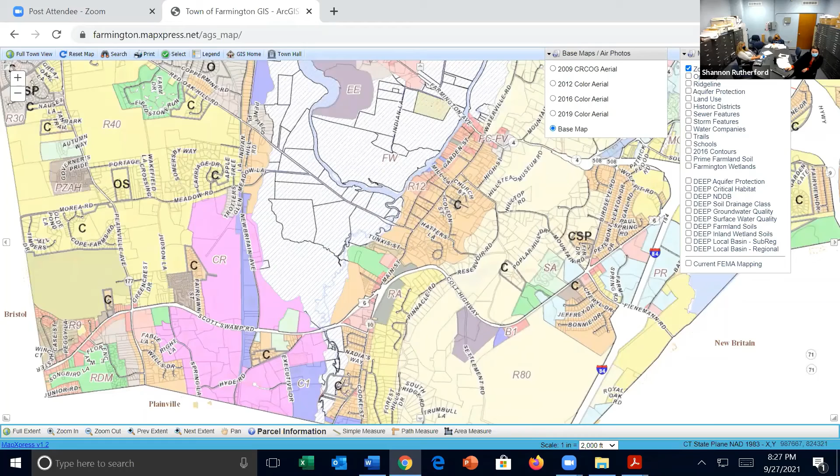Absolutely. Okay, thank you, that's it for questions for me. Thank you. Mike? No questions. Appreciate town staff for putting this together, I think this is what the majority of us were looking for on this. So no questions. Marcy? I have no questions. Thank you. Keith? No questions.

Thanks for all your hard work. This 100% satisfies it. I remember the lawyer from Exclusive Inc. was very concerned about tattoos being deemed an adult use and being thrown in with other adult uses, and this completely satisfies that as well. Yes, Keith, this is separate, it's under the zone rather than under a special category. Yeah, no, it looks great, I think you guys did a great job on that.

Thank you. Of course. John? No questions? Scott? No, I'm all set, thank you for the work. Excellent. And Inez, I echo what everyone has said. I think it's one of those that needed to be updated, right? Yeah. And maybe we'll have a chance in the future to look at some of these. I know this is more work for you, Catherine and Sandy, but I think this is the way to go, and it's nice and clear. The attorneys weighed in, so good. Thank you for your work.

All right, so we have the questions from commissioners. Is there anyone on the line, it's a public hearing, is there anyone that has any questions or comments? Raise your hand, please, again this is a public hearing, please raise your hand using the Zoom function. There are no hands raised at this point in time. Okay, so at this point I will close the public hearing for Town Plan and Zoning Commission for the text amendment for the tattoo and body piercing studio.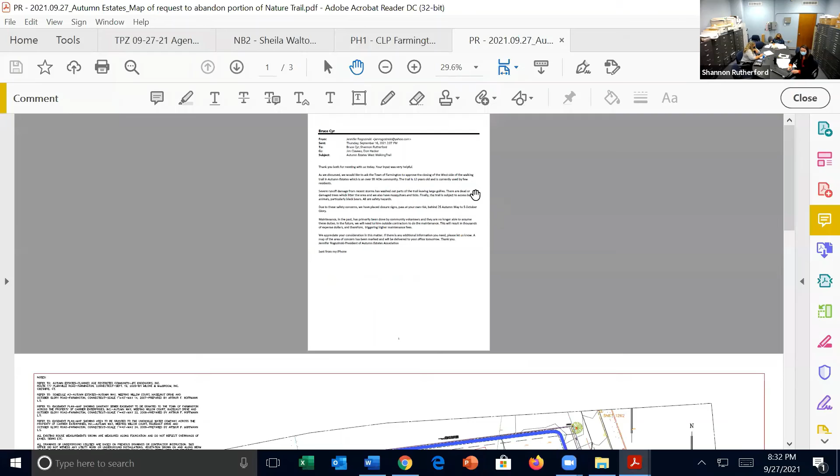So this is it, all the public hearings were done. There was one new business item that we didn't cover. I don't know if anyone ever called in. I say we give Sheila and Tracy an option to speak up if they are on the line, or raise a hand if they are calling in. But I don't see anyone under their name or anyone raising their hand under attendees that are trying to present for that application. That's fair, we'll follow up with them and see if they are available for the next one.

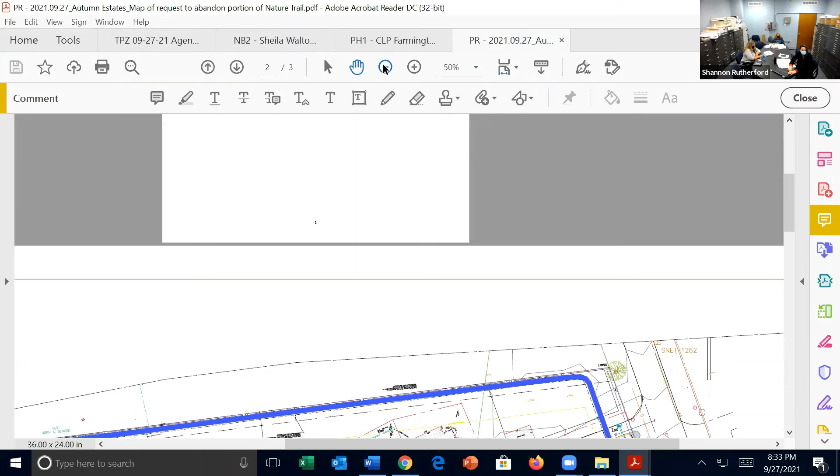Excellent. All right, so Catherine, do you have any updates for us? Yeah, so I mentioned briefly in the planner's report, Autumn Estates Trail, the town staff was contacted by the property manager at Autumn Estates, and due to repetitive storm drainage damage, it has led to trail maintenance issues, and they're looking to abandon part of their trail. But this trail was part of their approval package, so they are curious as to the perspective of the commission.

Town staff has reviewed the conditions of the trail. The part of which they're looking to abandon is here in red, so it would be this piece on the outermost edge. They would maintain the blue piece; they would continue to have that. Again, they're looking into this and wondering if there are major concerns from the commission. From the town staff's perspective, they still have their trail. They're just getting rid of a piece of it that's not really working for the site and causing some maintenance issues as well as safety of access. So from town staff's perspective, we don't have big concerns about a portion of the trail being abandoned, as they are agreeing to maintain some other sites.

So I'm opening this up to see if anyone has comments. So it's in the back of their site, right? Plainville Avenue's on the right? Yeah, okay. Go ahead, sorry Inez. No, I didn't mean to step on you. No, you're so sweet, thank you.

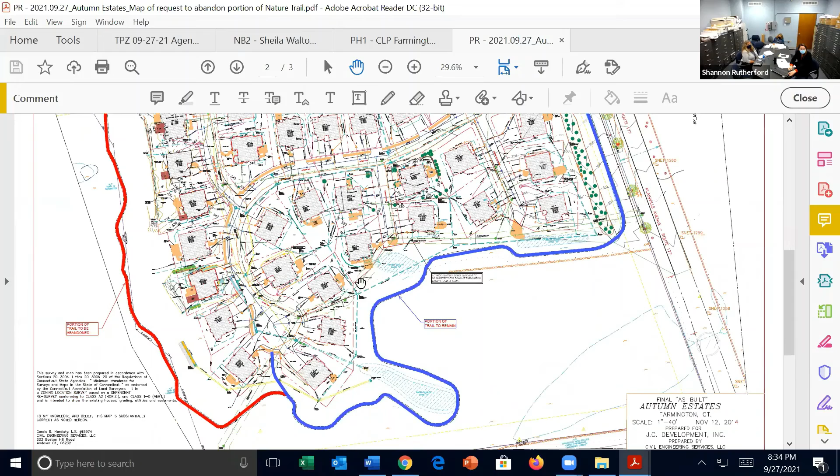No, I was just trying to orient myself, and then who uses this trail? Only residents? Residents, yeah. Okay, and then they would probably amend whatever records they need to on their end. Yeah, we would use this map as a record of what continues to be maintained as their trail. Okay, all right, that's it.

I don't have any issues with it. I was just wondering if it's open to the public or anything like that. Go ahead, Patrick, we'll circle through all of us, all the commissioners.

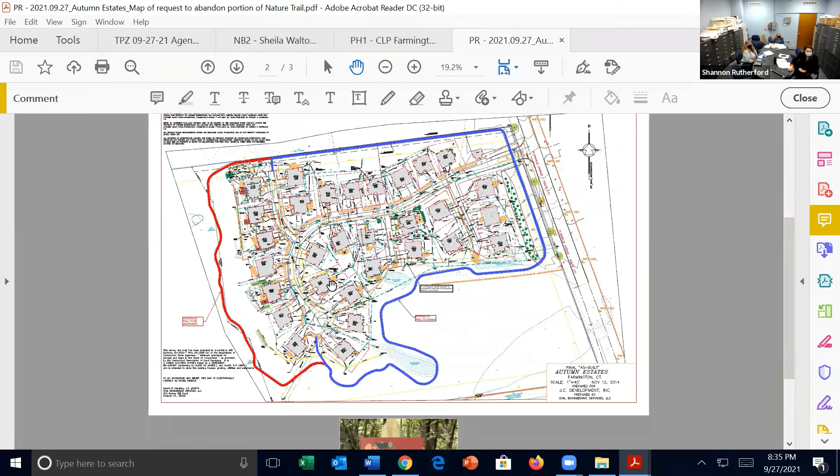Okay, yeah, so this part of the trail, why is this getting washed out? Is it lower in topography, or did you guys come up with a reason why that is? Let me pull up the... why, it's severe runoff damage from the recent storm leaving the trail with large gullies and a lot of fallen trees. So it's being just taken over by the elements these days with increased storms, and the vast amount of rain we've had this summer I think has just kind of pushed the needle as far as the need for maintenance of this most outer edge of their trail.

Okay, yeah, so I'm assuming it has something to do with just the way the water goes or whatever. My experience with this is we're actually doing an active adult in Cheshire, and we have a trail like this. I don't know how much they use this trail, but I'm assuming the association's on board with getting rid of it. I mean, I would assume that's obvious. So they came to us for our first review to see if this was even feasible. Yes, the HOA and community have said that this trail is not used frequently, so the financial costs to upkeep it just don't seem feasible or really reasonable, especially when there is so much trail still to be left.

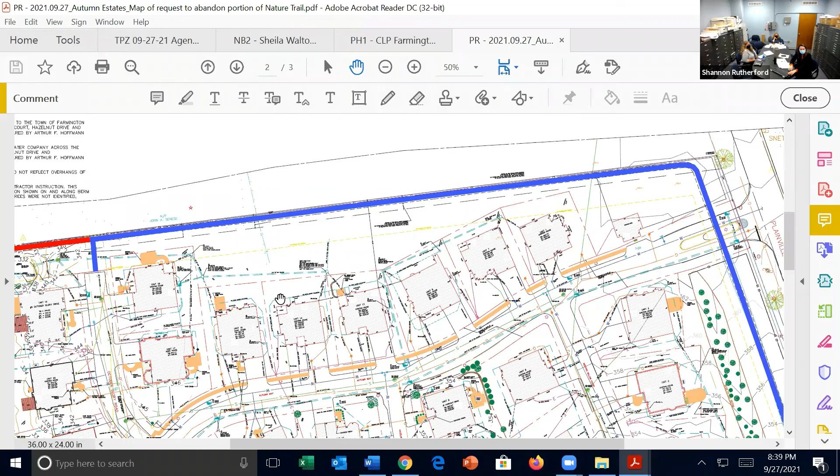Well, I'll just say it was part of the original approval, and it's not before you as a proper application. It's before you as a planner's report, to keep you informed and make sure there's no major concerns or other perspectives that town staff hasn't considered, which is why I'm bringing it forward informally. We think it's fine, but I'm presenting some of the other happenings around town, and if you guys think we're going rogue allowing part of this trail to be abandoned, please speak up. But if there are no real concerns, we can move forward.

One other thing I'd say is this piece was actually approved years ago, and my uncle is the one who built it. A trail like that, it's not the town that asks. In that particular case, I don't believe it was the town. That's something we thought they would use, and we learned over the years that they really don't. I don't know if that makes a difference. I guess, as precedents, I would imagine as they come forward, we can make that assessment.

Would it set precedent if we left it at the staff level, but then something else like this came in, we could always ask and have them come before us, correct? Absolutely. We try to look at each issue, or I don't want to call it an application, but each site on its own individual scale and context, since changes and times change. So we can always reassess how we handle these sorts of things. But for this situation, we felt this was a fine way to handle it.

Yeah, and I agree. Just knowing the history of these types of things, it'd be one thing if they wanted to get rid of the sidewalk in front of their house, but this type of thing ends up on the plan and we want it approved by the town. After that, it's almost like it's part of the plan. But again, the intent at the time was more of a developer-pushed thing, not a town-pushed thing, I guess. Thank you.

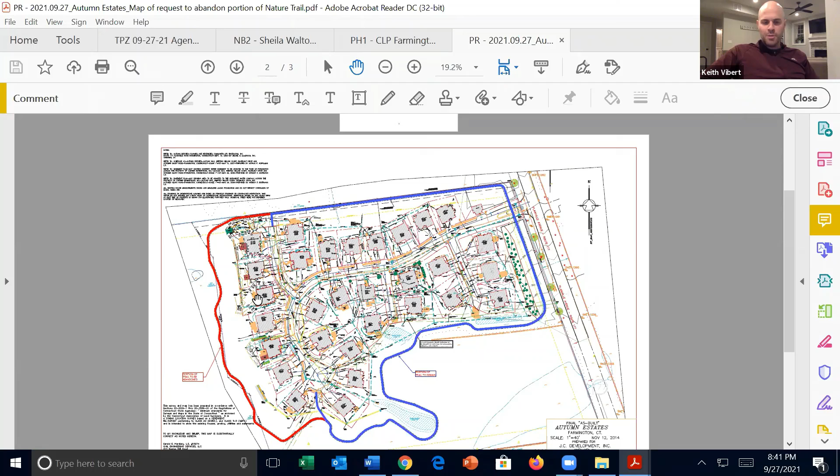Since we all went through this, Keith, we'll finish up with questions. Keith, do you want to comment? I only had one silly question, which was, I see where the two blue lines end. I assume those meet up with sidewalks inside the community. Yes, this is the cul-de-sac here, and this is the road over there. No one will get stuck at the end of a dead end, so... No one wants that. Works for me, yeah.

And John? No, as long as this trail wasn't a critical element of the approval, I don't have any problem at all with it being abandoned. Thank you. And Scott? Nope, I'm all good. Ditto what everybody else said.

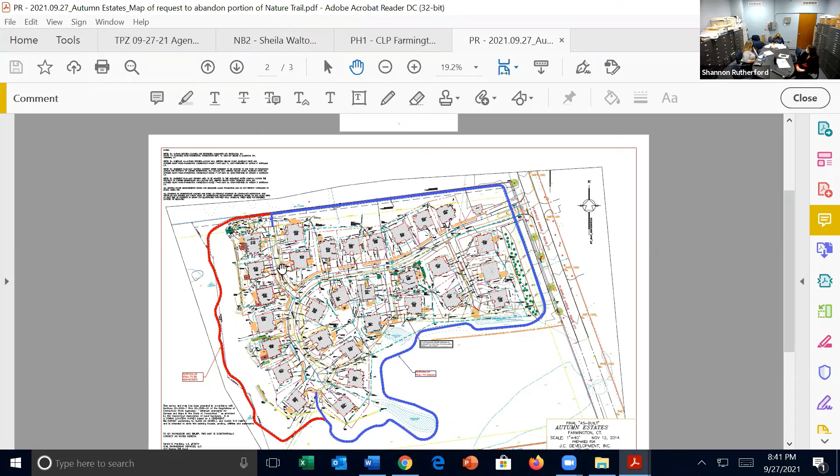All right, and they are maintaining it, like there won't be garbage or anything in there? Yeah, look at their trail closed sign. Okay, all right, good. Yeah, as long as they're maintaining the blue part. Perfect. Awesome. Thank you for letting us know. Yep, anything else very exciting going on?